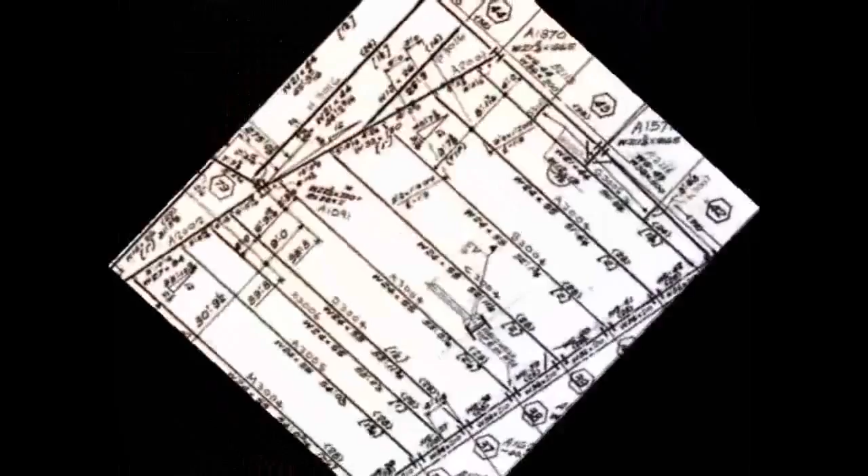This is the fourth in a series of short videos in which we examine the theory proffered by NIST with regard to the initiation of the collapse of World Trade Center 7 on September 11, 2001. NIST maintains that a single connection on a 13th floor girder, which spanned from column 44 to column 79, failed at the southern end.

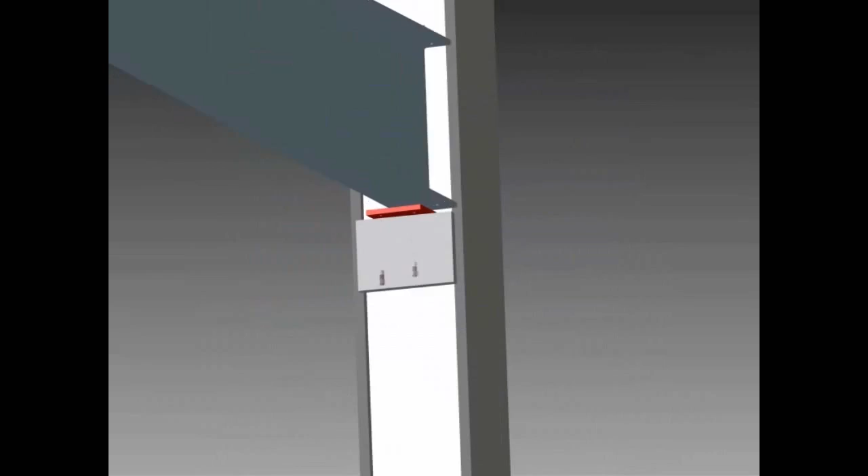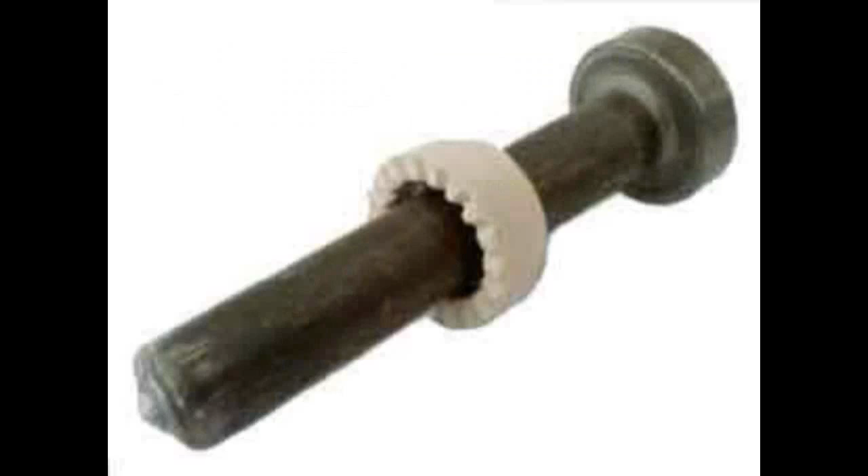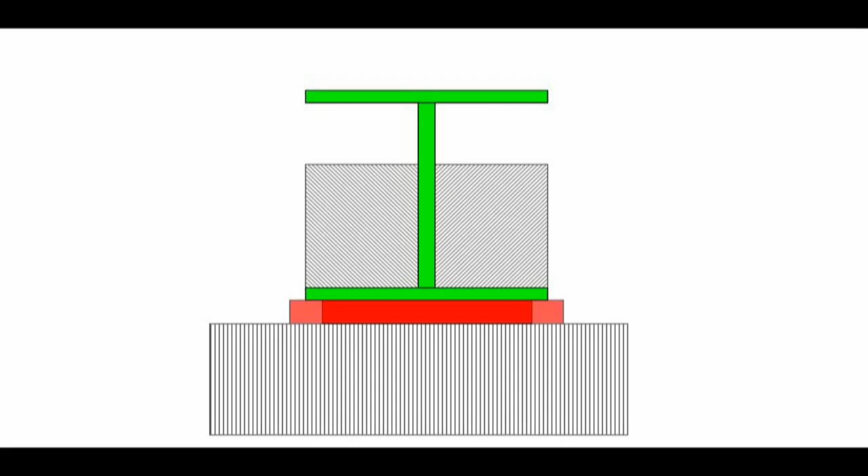Heat was said to cause shear studs to fail and then to expand beams attached to that girder, which pushed the girder from its seat. In the first video, we looked at the shear stud aspects and what effect they would have on the stability of the floor system. Next, we examined the feasibility of steel expanding enough to cause the movements required. In the third video, we explained how NIST had misrepresented the connection in question and how it became impossible, when the correct elements were shown, for the girder to be pushed from its seat.

Soon after the release of our third video, we were surprised to see that NIST issued an erratum document in which they admitted that they had incorrectly stated that the connection seat was 11 inches, and now confirmed that it was in fact 12 inches. A simple typo was offered to explain an error of some significance.

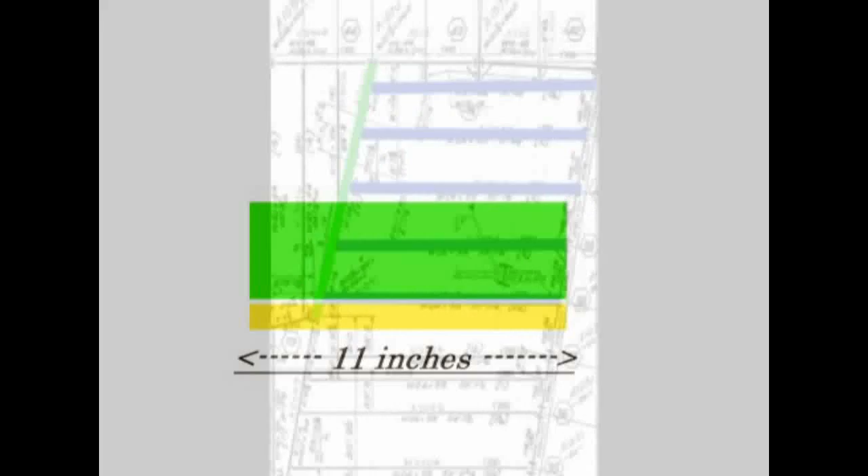At this point, we should highlight that the main contention of the failure was that a temperature of 600 degrees centigrade caused 5 beams to expand 5.5 inches, and that if the seat was 11 inches wide, then the girder would be pushed that 5.5 inches and would fall off its seat as it moved halfway across. In fact, at just over halfway, an unsupported flange would fold upwards as the load left the vertical web of the girder.

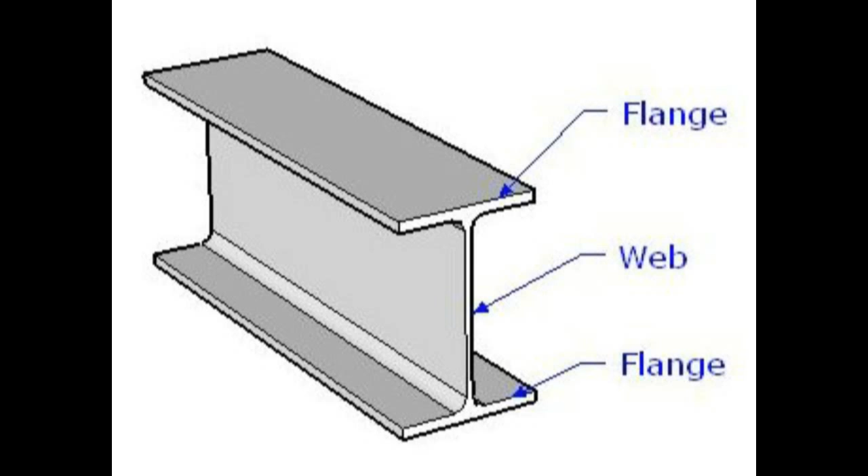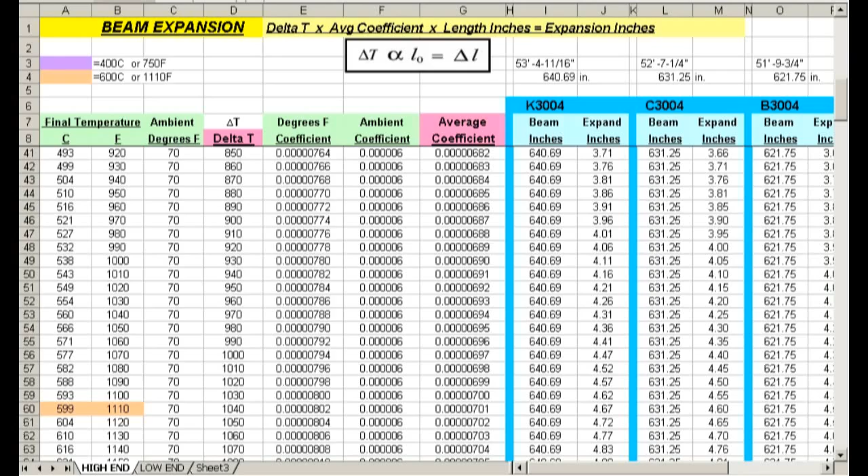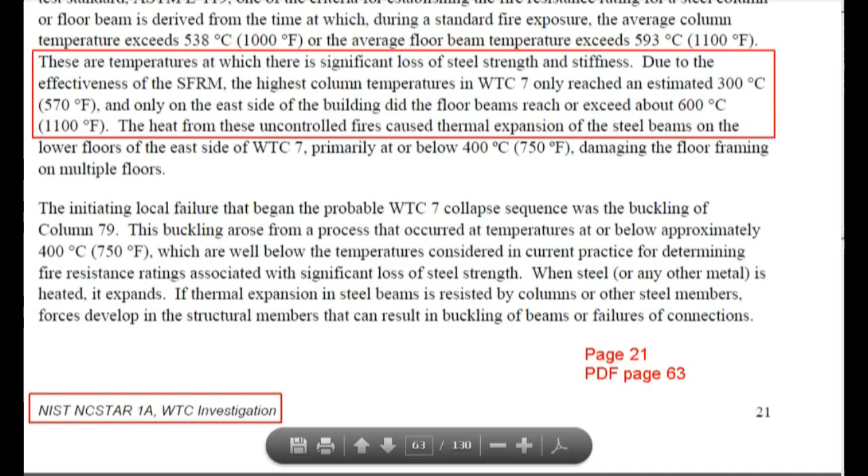More about this later. Perhaps the maximum temperature of 600 degrees centigrade was carefully selected by NIST to attain the maximum expansion, because according to NIST, beyond 600 degrees centigrade steel loses strength, causing it to sag, which would render the beam incapable of pushing the girder in any direction. As 5.5 inches is the maximum expansion, then on a 12-inch seat, no failure would occur.

Naturally, our ears pricked up. Curiously, within the same erratum document was another error, said to be one of transposition rather than an inaccurate or misleading statement. It was claimed that a transposition of the figures had occurred and that the measurement of 5.5 inches for the beam expansion ought to have been replaced with the measurement of 6.25 inches, which appears in another section of the report, and vice versa.

It does seem incredible that such a critical component of the whole report would be overlooked in the proofreading of the draft and then missed again at the final signing off of the report.

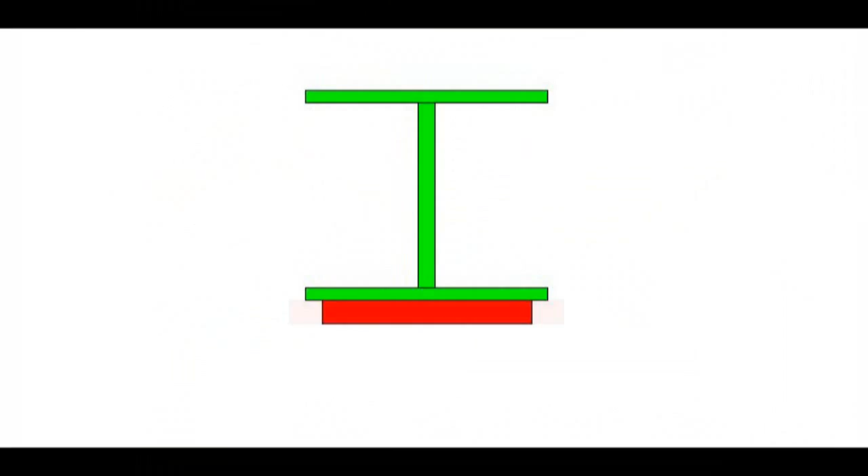It's interesting to note that had this second careless error been detected, then the expert investigators would have had to revisit the seat error and also the temperature calculations. In doing so, they would have had to rethink their entire theory, perhaps concluding a different cause of failure, and all because of a typo.

But of course, the new figure meant that as the seat was 12 inches and the expansion now 6.25 inches, then the girder would still be more than halfway and still fail. Nothing to see here, move along.

But hang on, let's look at what temperature would actually be required to cause beams of that size to expand by 6.25 inches. Our earlier spreadsheet may help here. As you can see, it shows that a temperature of around 763 degrees centigrade would be required.

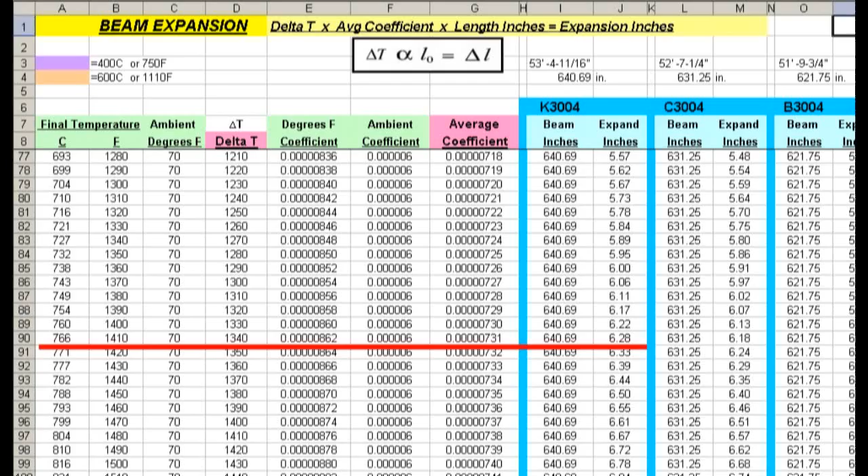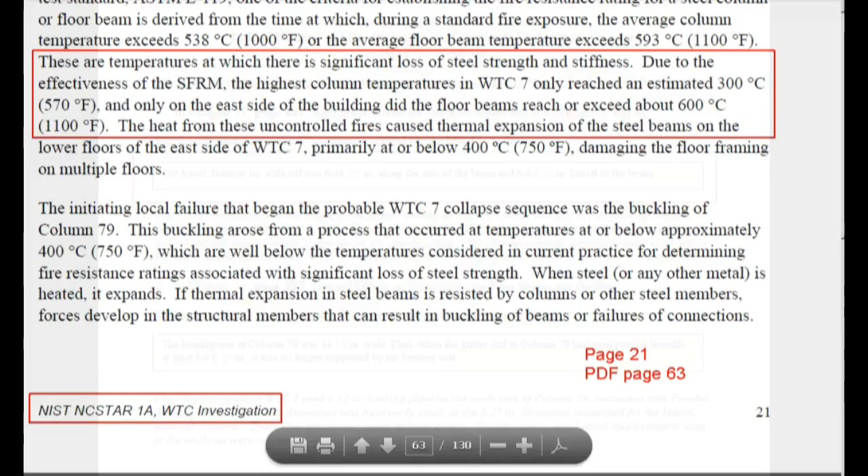And didn't NIST say that beyond 600 degrees centigrade the beams would lose strength and sag rather than push? Perhaps they forgot that when discovering the coincidental second typo. This aspect certainly needs closer examination.

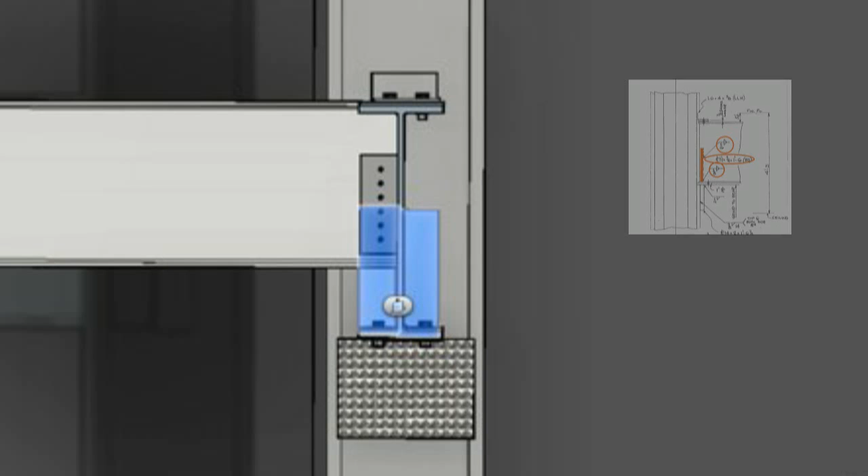In any case, NIST has still not acknowledged the existence of stiffener plates clearly shown on the girder end, shown here. Their explanation of the collapse of World Trade Center 7 relies on the girder on the 13th floor falling from its seat. Even at their new walk-off distance of 6.25 inches from a 12-inch seat, with stiffeners in place, the flange would not fold at all, but still support the load much further across that wider seat, more like 11.75 inches.

We intend to produce a single video to gather all of this information into one place, but for the moment we trust that this further short probe into the NIST report has provided new information, and we leave you with these questions.

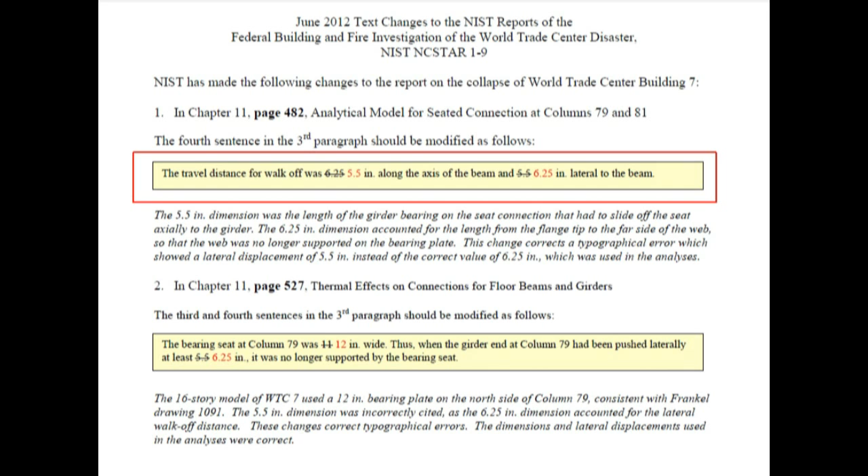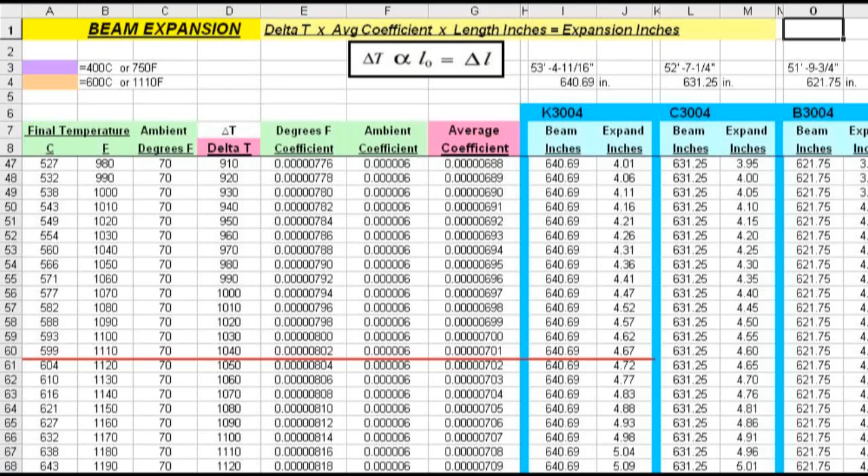Do you find it convenient that two typos occurred, one cancelling out the other? Is it not odd that NIST previously asserted that the maximum temperature possible was 600 degrees centigrade in order to retain enough strength to cause the push required to shift the girder from its seat, but subsequently require a temperature of 763 degrees centigrade to expand by the adjusted measurement of 6.25 inches?

Do you find it odd that they still make no mention of the stiffeners shown in all drawings, which would make both the 5.5 inches and 6.25 inches irrelevant, as the girder would still not fail with stiffeners in place? Watch this space.